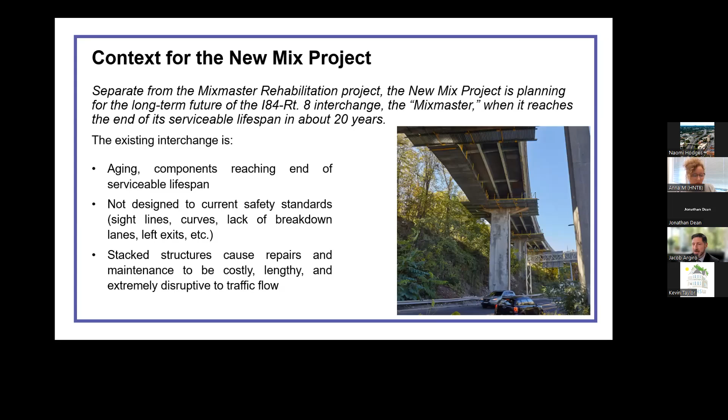And now we're looking at a major reconstruction and what the future would look like in the next 20 years for that new construction. So the New Mix project is that long-term planning study that looks at how to reconnect the interchange. It's anticipated that this is going to be phased over a period of time with an overall goal to modernize, improve the safety, the functionality, and while reducing congestion, which in turn can improve air quality, and align the project with the city's economic development.

and community goals. So these planning studies and analysis activities are conducted with input from you, the general public, the stakeholders, and it's going to produce transportation planning products that are going to serve both ConnDOT and the city of Waterbury's transportation needs and meet the requirements of the regional transportation improvement planning process. So the PEL study is going to end up being a report, as well as a questionnaire that's going to be developed to help get to that point of the report.

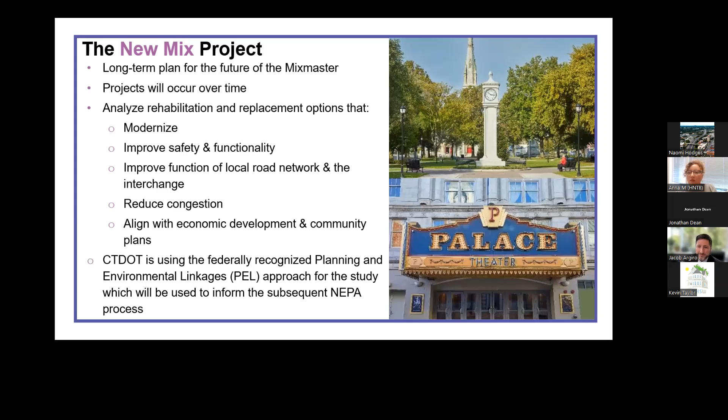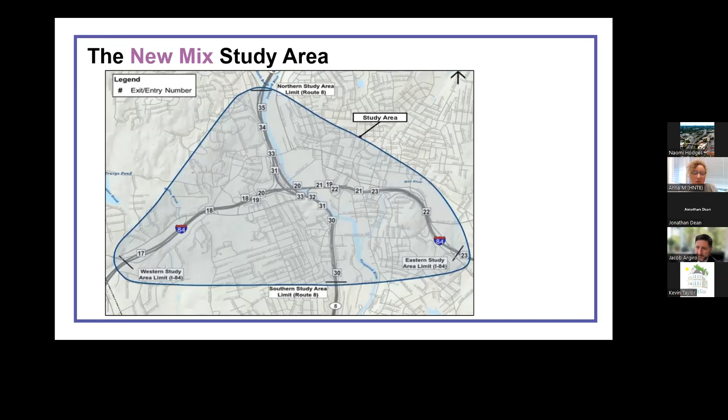So let's talk about the process. With the goal to begin construction in the 2030s, there are a number of steps for us to get there. Right now in the first box, this is where we are today. We're currently in the midst of this PEL study with the goal to identify that range of reasonable alternatives for major reconstruction of the interchange.

Followed up by the NEPA process. The goal here is to identify a preferred alternative in a record of decision so that we can move forward with the next step, the design and permitting process. Now, a number of years is required for a job of this complexity and magnitude in order for us to achieve the goal to start construction in the early 2030s.

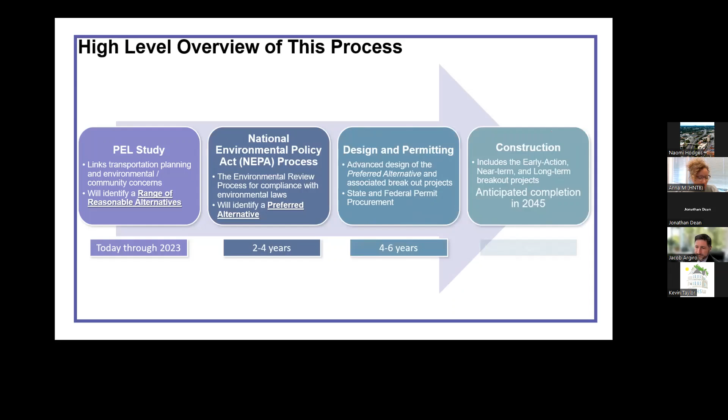Going to the next slide, let's talk about the PEL study and the process. Each of the steps of the PEL study represents a lot of work, discussion, public feedback, and documentation.

At the first public meeting, we covered the transportation needs and deficiencies. The PEL study, the purpose and goals represent that draft, purpose, needs, goals, and objectives.

Today we're going to cover the universe of alternatives in the first round, and only the first round, of that screening criteria. There are going to be three levels of screening that will occur over this PEL study, which will help us whittle down that universe of alternatives that David's going to get into very shortly.

That's going to leave us with alternatives that are closely aligned with the project purpose, the needs, the goals, and objectives of the department, as well as stakeholders in the municipality, the city of Waterbury.

One of the first steps in the process is the evaluation of where the deficiencies of the project are and determining the needs required to alleviate those deficiencies. Where we're really focusing initially are the needs pointed to the structural deficiencies, the geometric challenges we all face driving through the interchange, and the operational deficiencies.

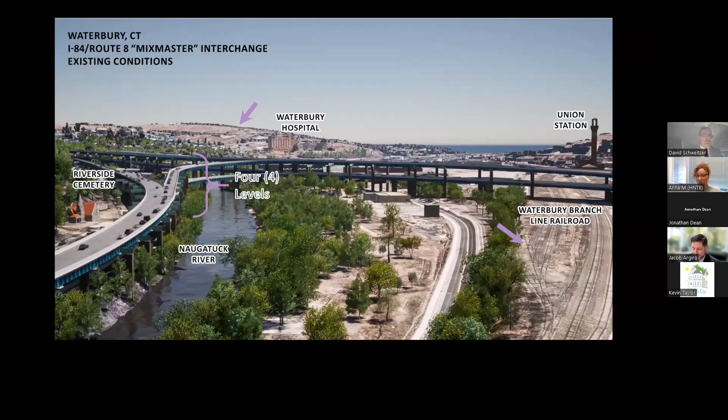From this, the team developed 23 alternatives, broken into four groups, and we're going to go through each one shown as puzzle pieces individually. The first one we looked at is a no-build alternative. This is considered our baseline condition - if we do no improvements other than those already identified in the transportation improvement plans.

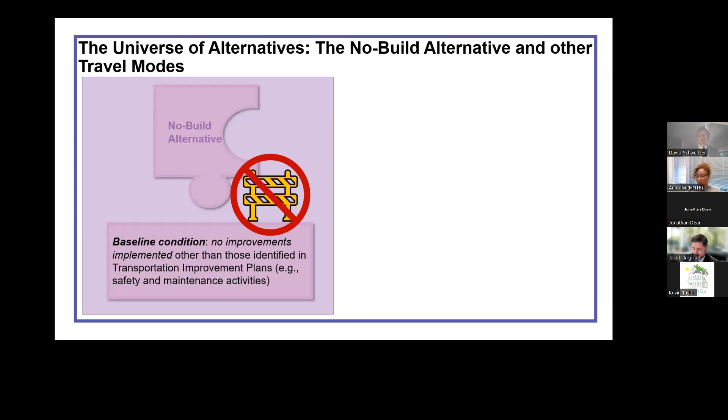The next piece we look at is called travel modes. These involve no improvements other than those that involve transit, rail, bicycle, pedestrian, and other modes of travel that will provide the solution to the purpose, needs, goals, and objectives of the project.

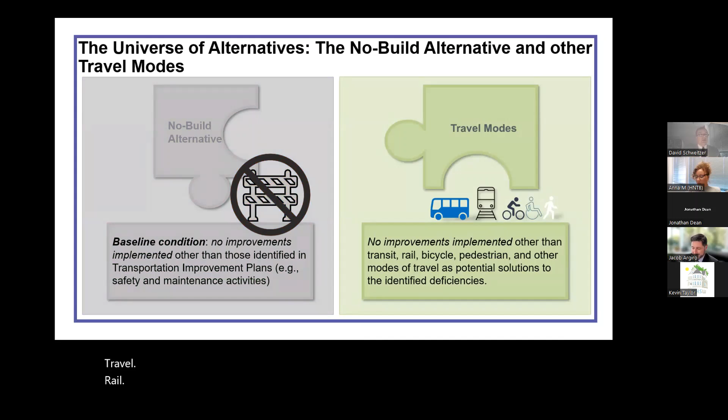The third piece of this will be the rehabilitation alternatives. As Jake talked about, these focus on the I-84 structures, replacing the decks on the I-84 structures. The current rehab project is replacing the decks on the Route 8 bridges. So when we looked to the future, we wanted to make sure we could replace the concrete decks on I-84.

The fourth piece are the replacement alternatives. These explore the full reconstruction of the Mixmaster on different alignments, new structures, and new connections between the main lines, both to the local level and between the main lines themselves.

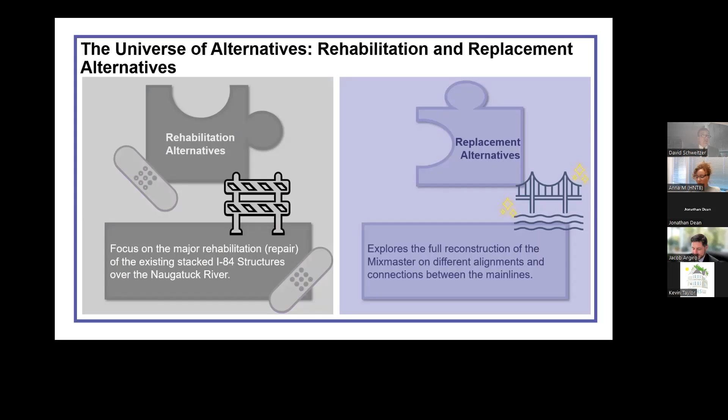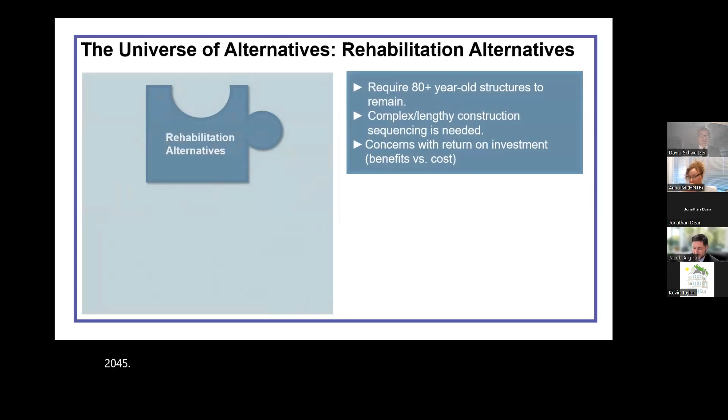If we look back at the rehab alternates, a few things to point out: at the end of a rehab project, your structures are still going to remain, so these will be 80 years old in the year 2045. You'll have complex and lengthy construction sequencing, and there'll also be concerns with the return on investment - your benefits versus your costs. So if we look at our purpose and needs, and also our goals and objectives, with rehab alternatives, the opportunity to improve or meet these is low.

Conversely, with replacement alternatives, we're looking at options with complete replacement of the main lines, both I-84 and Route 8, with new structures and new connections, along with the constraints that affect feasibility of improvements. When we look at our purpose, needs, goals, and objectives, our opportunities to improve these have greatly increased.

Tonight, or after tonight, you'll get to look at these 23 alternatives on the website. We're not going to go through them all tonight, but we want to point out some major features you'll see with these alternates that will help you understand and decipher them.

The first major features here are the I-84 and Route 8 alignments. I-84 runs east-west, while Route 8 runs north-south. Paralleling Route 8 is the Naugatuck River.

Oh, I'm sorry, I forgot the local level. Below that is the local level, shown with the grid below. We also have the Naugatuck River, which parallels Route 8, flowing north to south. On the west side of Route 8 is that ridge line we showed in the rendering previously.

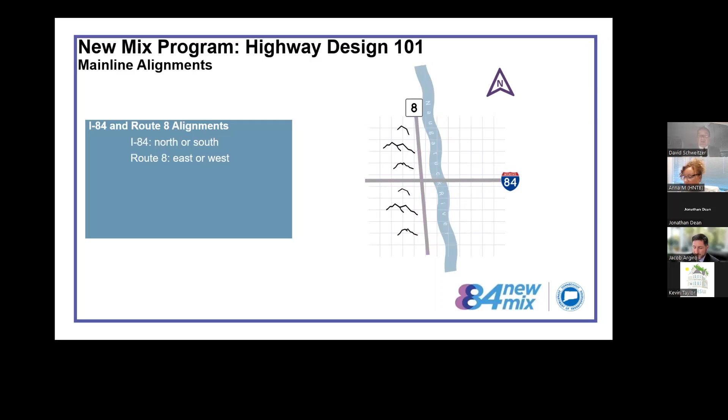If we look at the alignments with I-84, we can reconstruct it in place, construct it to the north, or reconstruct it to the south. With Route 8, we can move it to the east, construct it in place, or look to move it to the west. Notice that Route 8 wiggled there due to that ridge line and some landmarks that can make that a little more difficult.

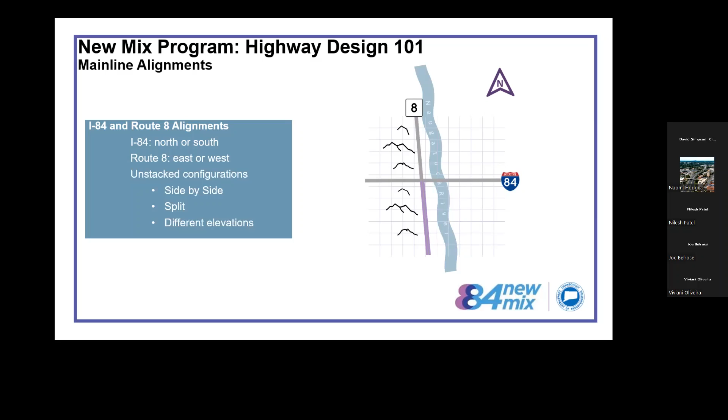Another thing we looked at is unstacked configurations. As Jake pointed out, some problems with the stacked configurations led us to look at placing these main lines side by side. We also looked at a split configuration where we may take one bound, most likely with Route 8, and move it to the other side of the river while the other bound remains in place. We also looked at these side by side configurations at differing elevations.

The next thing we looked at is the interchange itself, these system connections. System connections are the highway connections between I-84 and Route 8, so we have options with those. We have a full system interchange with direct connections - roadways that stay within a highway environment to get from one main line to the other. A full system interchange means all 8 of these movements are direct connections. The interchange as it exists today is a full system interchange with all of those direct connections.

The other option we can have is a partial system interchange. This is where you can have indirect connections, where the connection between the main lines must leave the main line, go down to the local roadway network, flow with local traffic, and then get back up on the main line of its destination. This is usually used when traffic volumes on these movements are lower. Out here on this interchange, we have 3 candidates for this.

We have the eastbound and northbound movement, the northbound to westbound movement, and the eastbound to southbound movement.

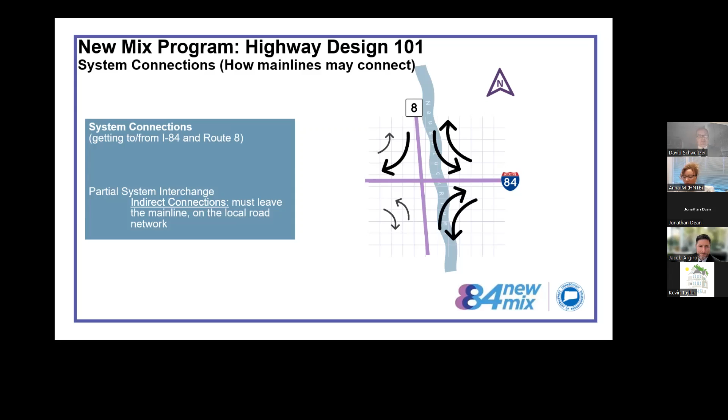Another feature you'll see when you go through these alternatives is crossover interchanges, referring to how a system movement is made. If you look at some of the movements out there today, specifically the Route 8 southbound to I-84 eastbound movement, that is a left-hand exit and then a left-hand entrance as a direct connection. But we're trying to eliminate those left-hand movements.

So what you end up having is a right-hand exit and then a right-hand entrance. But in order to achieve this, that system connection must cross the other main lines, and that's why we're calling it a crossover interchange. It may go over, it may go under. A flyover ramp, like in downtown Hartford, is a very good example of a crossover movement.

Another feature you'll see on a lot of these alternatives is what we're calling combined connections, where system movements are combined so that we have one less entry point on the main line they're exiting or entering. This can go in several ways. We can have entering system movements where, as this example will show, the Route 8 southbound and Route 8 northbound movements that want to get to westbound combine to form one ramp movement, so it's one point of entry onto I-84 westbound.

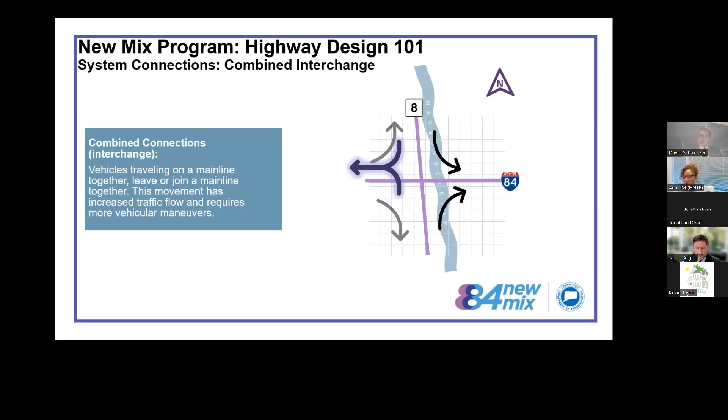We can also have exiting combined connections. In this case, we'll show I-84 westbound where the connections, the system movements to Route 8 northbound or Route 8 southbound, would exit I-84 together and then split once away from the main line to reach their destinations along Route 8.

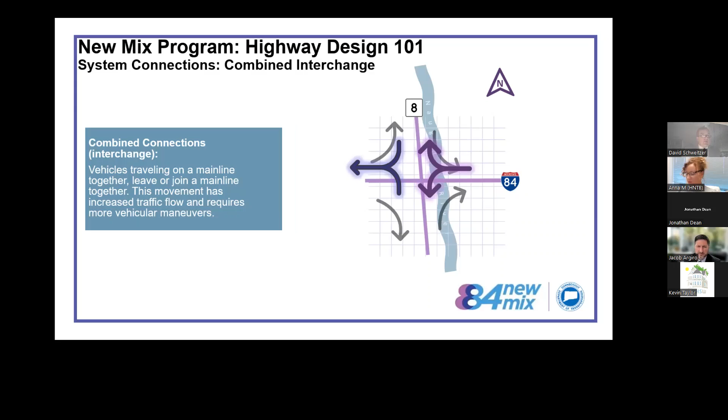Another factor you will see a lot of while looking through these alternatives is local connectivity. This includes the placement of service interchanges, which are what bring the main lines down to the local level or from the local level back up to the main line.

You also see frontage road systems, which are used to connect that local roadway network. The frontage roadways can be more of a one-way type of roadway system, normally in pairs, helping to promote better traffic flow.

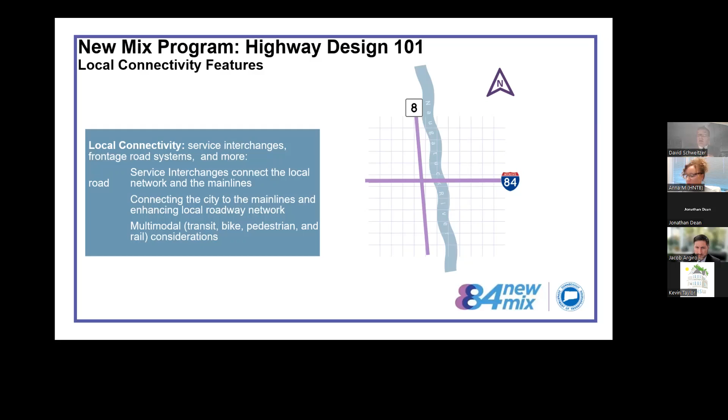They can also be utilized as complete streets for pedestrians, bicycles, and other modes of transportation. Touching more on that multimodal aspect, this is where the urban design aspect of our diverse team of designers came into play, looking at transit, bike, pedestrian, and rail considerations.

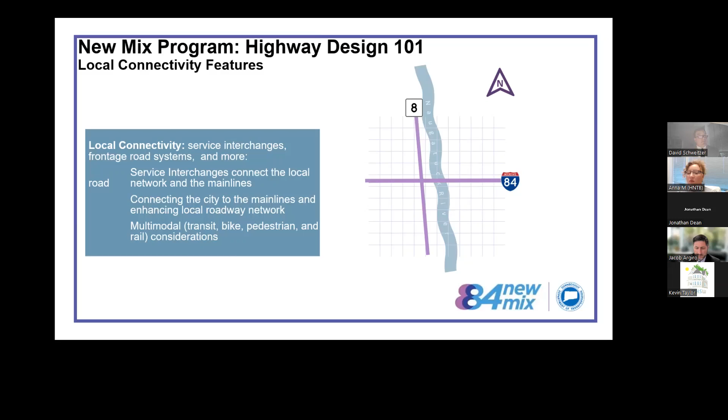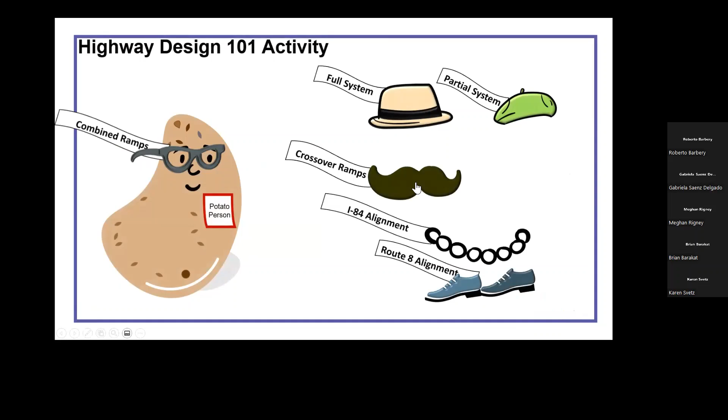As you look at all these features, what we get is kind of a Mr. Potato Person sort of aspect, because there can be a mix and match with a lot of these features. For example, we can either have a full system or a partial system interchange, but not both. As for combining ramps, crossovers, or main line alignments, we have different choices that can be mixed and matched through the alternatives.

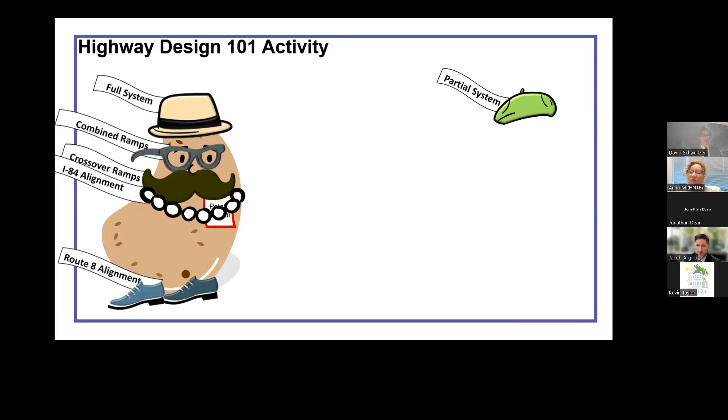When you access these, there will be a how-to video on the website to help guide you if there are problems. You'll click on one of the boxes, and it'll bring up that alternative, showing you a picture or diagram of it, plus a verbal explanation of what is going on to help explain it.

So that is an overview of the universe of alternatives. And I'm going to turn it over to my colleague, Naomi Hodges, who's going to walk us through our level 1 screening criteria. Yes, thank you, David.

So we did go through a lot of information there. Where I come in is talking about our screening process, how we will use this PEL study process to narrow down that universe of alternatives. So just getting back to this very trusty graphic and our trusty funnel here, you're going to be seeing this a lot because it outlines our PEL study process completely.

For each project alternative within the universe of alternatives, they would be screened against our purpose, need, goals and objectives. We intend to develop criteria, and we have developed criteria, that will be used to evaluate all of the alternatives that exist within the universe.

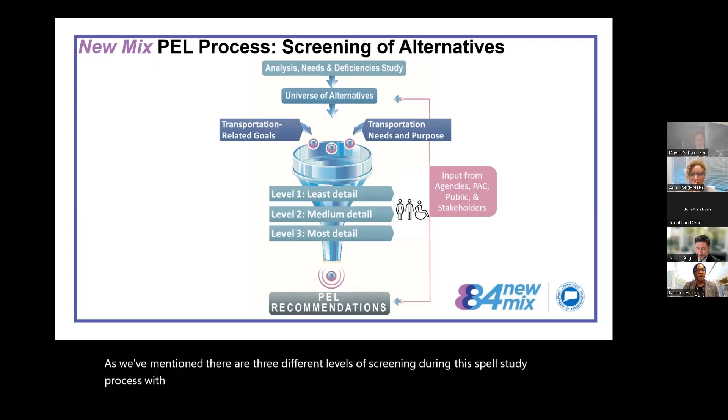As we've mentioned, there are three different levels of screening during this PEL study process, with each level becoming more and more detailed. Today, we'll dive into a little more detail on the level 1 screening, which is our fatal flaw evaluation, very high level. I call it just a gut check of the minimal details of the conceptual alternatives we have at this point in time.

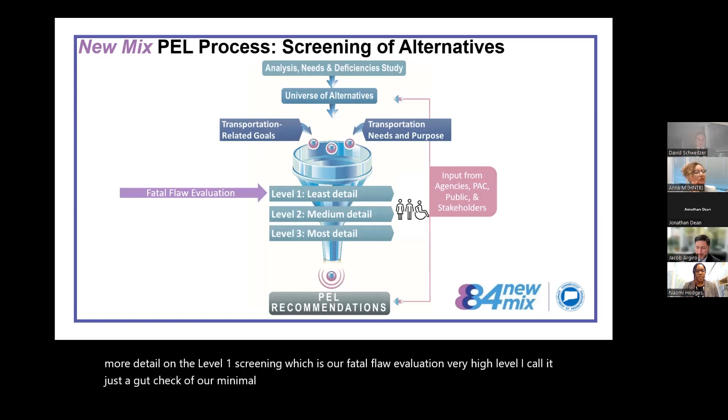When you visit the website, you will see that the alternatives are pretty much just lines on paper at this point in time, and that's because we have very minimal details at this point.

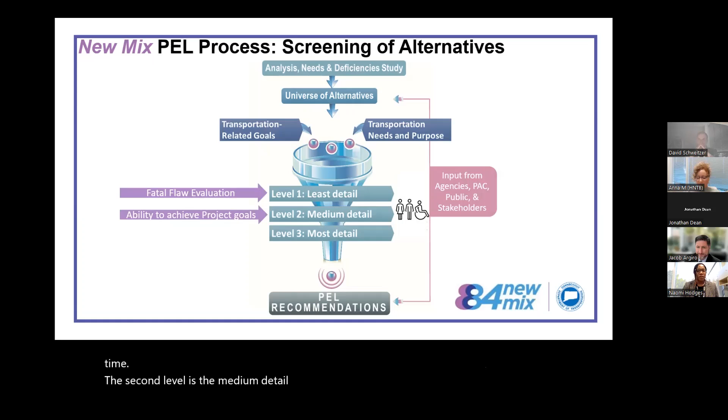The second level is the medium detail level. That's where all the goals of the community and environmental goals come in. We'll be looking at those goals and objectives that Jake mentioned earlier, and evaluating each alternative that can advance from that fatal flaw evaluation.

Those alternatives will be evaluated based on their ability to meet those goals. Some of those goals that we've identified from coordinating with the public and other members of the community include riverfront access, urban design considerations, complete streets, enhancing connectivity not only through the highway but also at the local level, looking at ways to expand the sidewalk network and bicycle and pedestrian routes. At this level we'll also look at environmental and transit options.

The ability for these alternatives to meet the goals of our study. The third and final level will have the most detail. We'll be able to identify impacts more directly, identify mitigation opportunities, and those goals and objectives will come into more detail. We'll have a lot more information to work off of.

When we evaluate those alternatives that make it to the third level, we'll be able to identify the reasonable alternatives. As I mentioned, with each level we are trying to dismiss alternatives that do not meet our purpose, needs, goals, and objectives. We're trying to get rid of those unreasonable alternatives and narrow down our 23 alternatives into something much smaller, alternatives that are feasible and meet the goals of our study and the community as well.

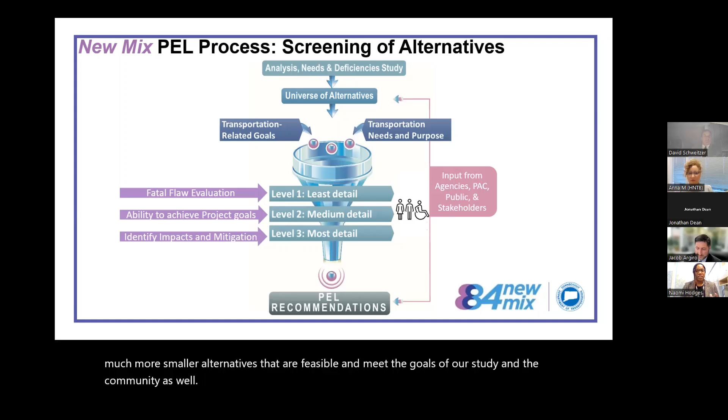Once we have that smaller set of alternatives, we have them as PEL recommendations. We also call them our range of reasonable alternatives. That's what is going to go into the NEPA process, where it'll have an even deeper review for the environmental record of decisions.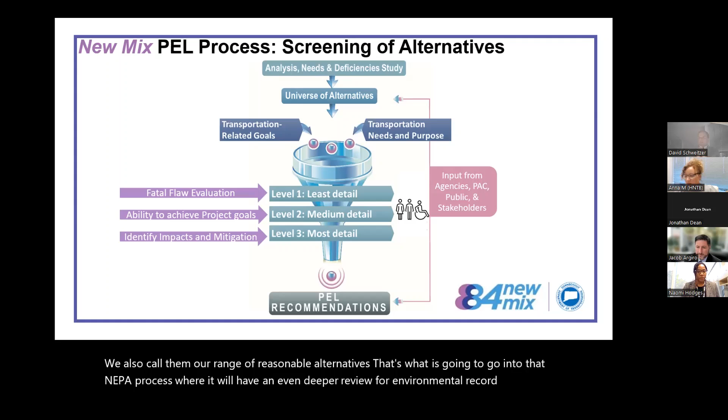Zooming in here a little more, we are focused on our level 1 screening, a very high level screening for every alternative in the universe. We took the purpose, needs, and goals and translated them into criteria. So beginning with this level of screening, it is going to be pass, fail. It's very high level, just engineering based, as I mentioned it's a fatal flaw evaluation.

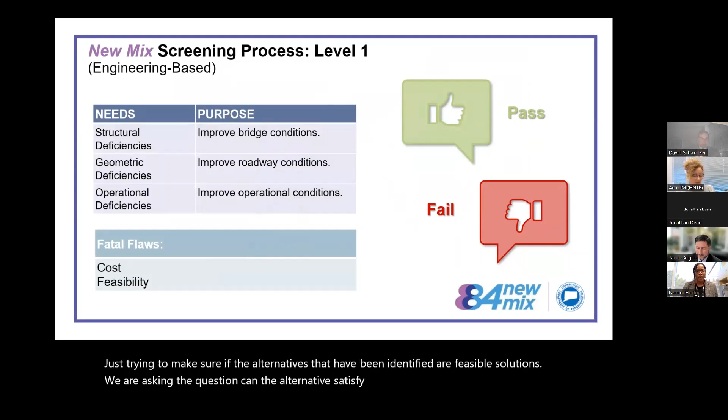We're just trying to make sure the alternatives that have been identified are feasible solutions. We're asking the question, can the alternative satisfy the purpose of the project, and does it have any fatal flaws? The purpose and needs have been translated into criteria for each category.

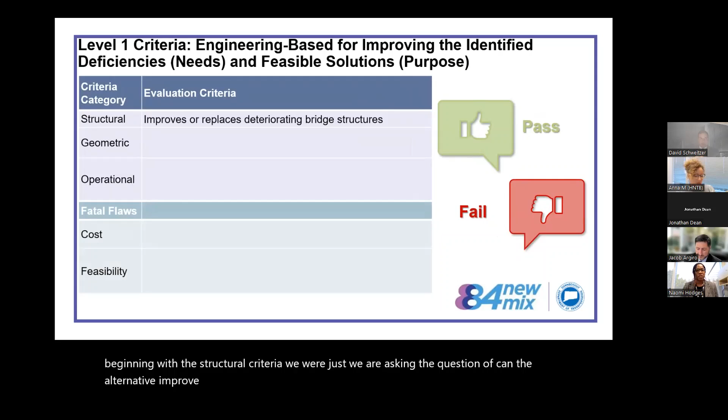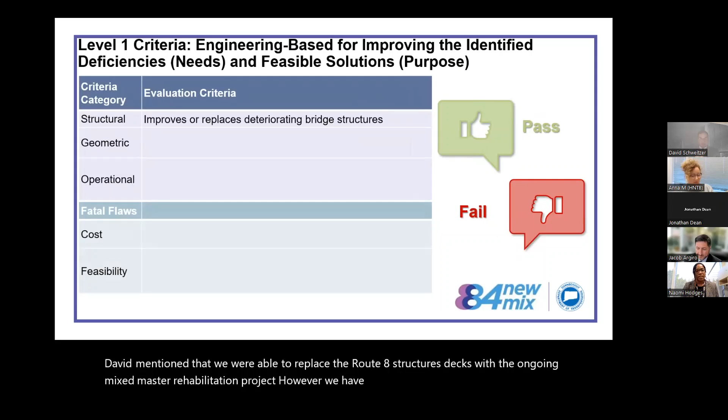Beginning with the structural criteria, we are asking: can the alternative improve or replace those deteriorating bridge structures? David mentioned that we were able to replace the Route 8 structures and decks with the ongoing Mixmaster Rehabilitation project. However, we have been unable to replace the I-84 decks. The decks that exist today are the original decks from when the Mixmaster was originally constructed. So one of the main purposes of this project is to be able to replace those existing bridge decks.

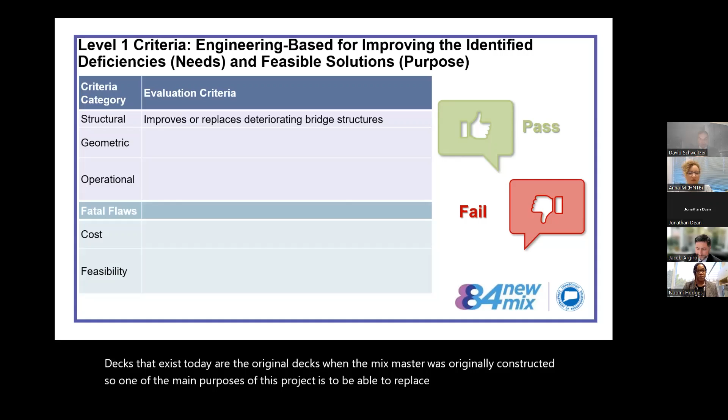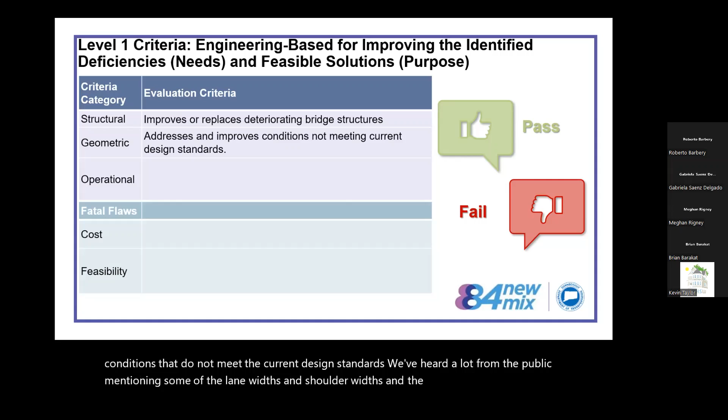For the geometric criteria, we want to make sure that we can address or improve the conditions that do not meet current design standards. We've heard a lot from the public mentioning some of the lane widths and shoulder widths, and the criteria that existed back when the Mixmaster was originally constructed has since been improved. We want to make sure that whatever the outcome of this study, those geometric conditions meet current design standards.

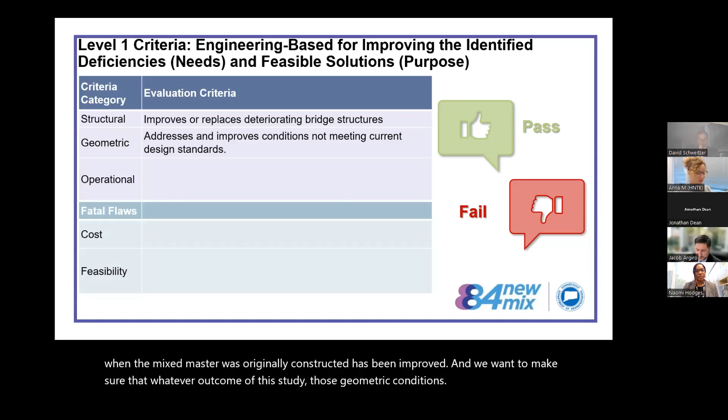Next we have the operational criteria, associated with how traffic operates on the highway and local roadway. We want to make sure that high volume movements can be made as direct connections - those are movements with uninterrupted flow from highway to highway. We also want to make sure lower volume movements are indirect connections, so those vehicles can use the local road network to make those movements without adversely affecting travel times.

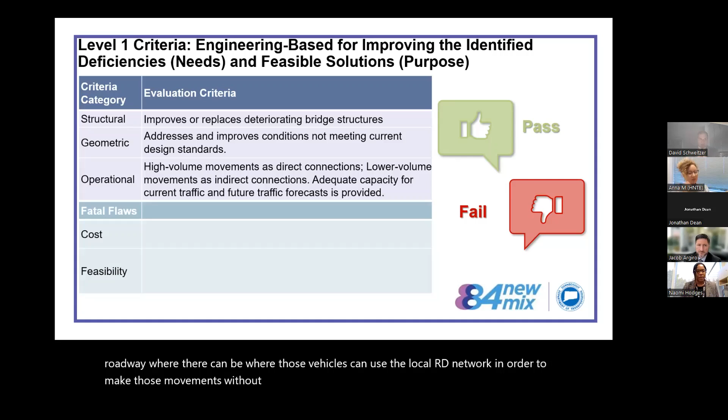In addition to that, we want to make sure that whatever gets put back, constructed, or rehabilitated provides adequate capacity for the current traffic as well as the future traffic that is forecasted for the project.

Then we move on to the fatal flaws, and those are cost and feasibility at this point in time. Very high level, starting with cost, we are just asking the question of: can financial resources be made available in order to construct this alternative? If it's determined that the costs are too astronomical, it's a fatal flaw, and unfortunately it would not pass.

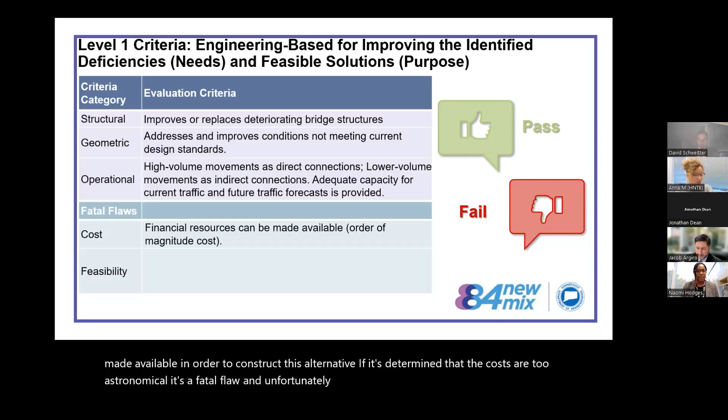Then for feasibility, we are asking the question of: can the alternative be constructed using proven technology and engineering methods? One key point to this evaluation criterion is that we have to make sure that traffic is allowed to operate during construction.

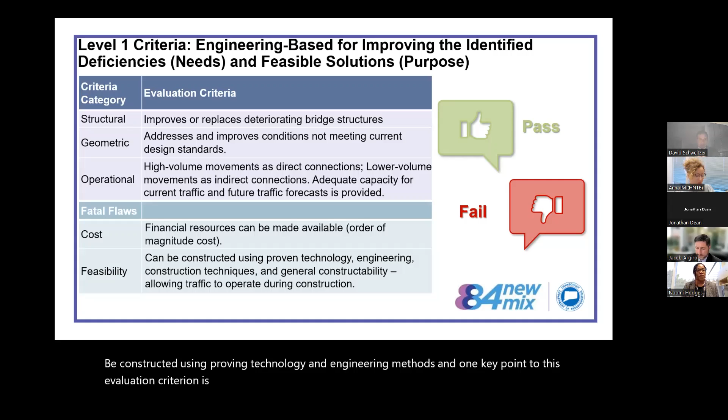It is key that I-84 continues to operate as a regional connector, as well as does not adversely impact members of the community who live within the area.

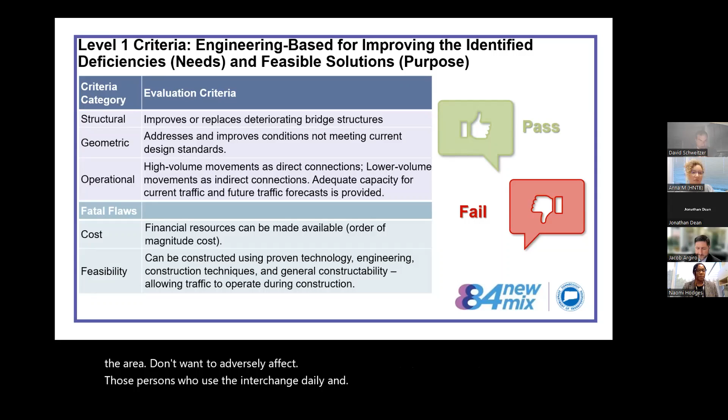Don't want to adversely affect those who use the interchange daily for their commute. So, a high-level overview of this fatal flaw analysis: at level 1, we are asking the questions, can the alternative satisfy the purpose of the project, or does it have any fatal flaws?

If we have an alternative and we are evaluating it based on this criteria, and it's determined that the structural criteria passes, the geometric criteria passes, operationally it's great, and cost is in our budget - however, feasibility is a no.

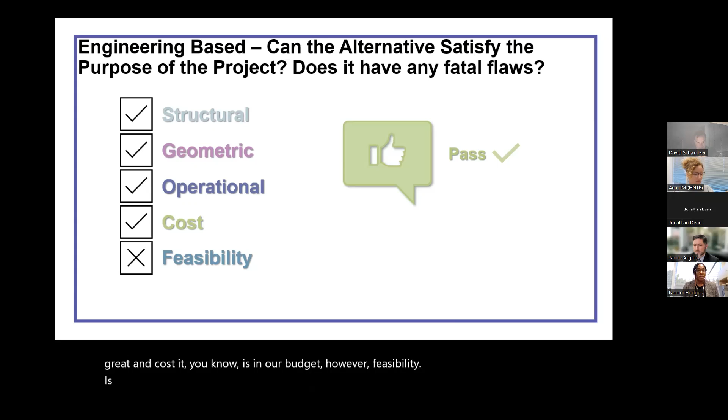Either it's infeasible to construct, or there are significant adverse traffic impacts during construction. At this very high level of analysis, we would consider that to be a failure to satisfy the purpose of the project, and because it has a fatal flaw, this alternative would be dismissed from further evaluation. It won't move forward in our evaluation for the next levels.

I want to highlight that David went over some of the features you'll see in these alternatives. If an alternative is determined to have a favorable feature, or a feature that is compatible and not fatally flawed, that feature itself could move forward as a complementary feature, whereas the full alternative would be dismissed from screening.

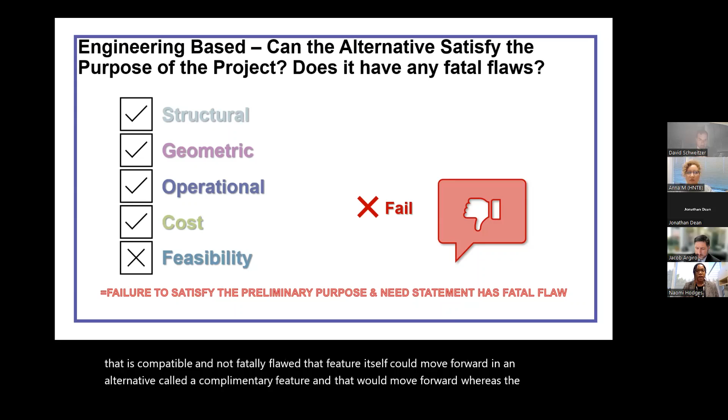Again, just to highlight this screening process - we are only at the level 1 screening at this point, and trying to get your input on that criteria. There are going to be 2 additional levels of screening, and at each level you'll have the opportunity to provide input, feedback, and perspective on the information we discuss through each step of our PEL study process.

Alternatives will advance, and those advancing alternatives that continue through our PEL study will be considered our PEL recommendations and our range of reasonable alternatives. And with that, I will hand it over to Anna to go over our next steps.